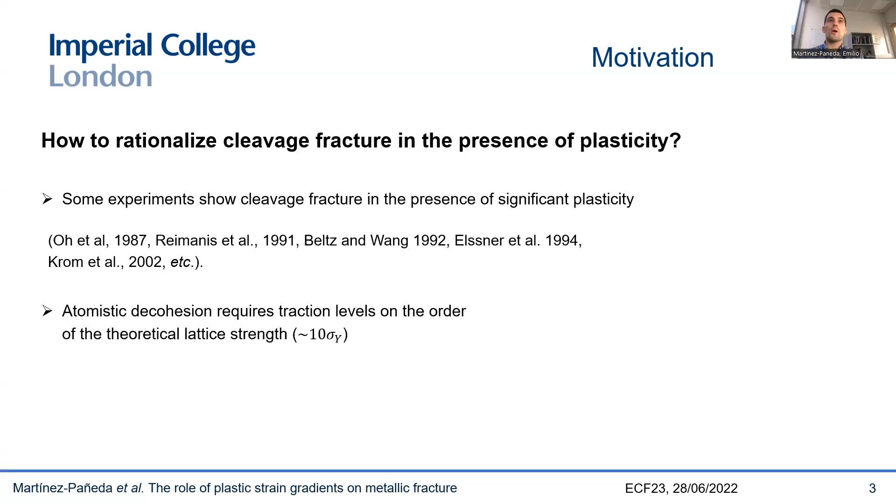This has always been quite puzzling for us, because we know that atomic decohesion requires attractive stresses on the order of the atomic or theoretical lattice strength, which is 10 times the yield stress. Even if we think of a grain boundary, we know that we need stress on the order of 9 times the yield stress to effectively decohere it. So this is puzzling because in the context of conventional continuum theories, there's no way that we can achieve those high levels of stress needed to reach the cleavage fractures we see in those experiments.

And we know this going back almost 40 years now, thinking of the work of Bob McMeeking. During his PhD thesis, he was the first to simulate using finite element analysis what the stress fields would be predicted ahead of a crack, taking into account large strains. As you can see, this is taken from one of his earlier papers. The maximum stress level that you get ahead of your crack is 3 times the yield stress. So we're very far away from those 10 times yield stress requirements needed to achieve the cleavage strength.

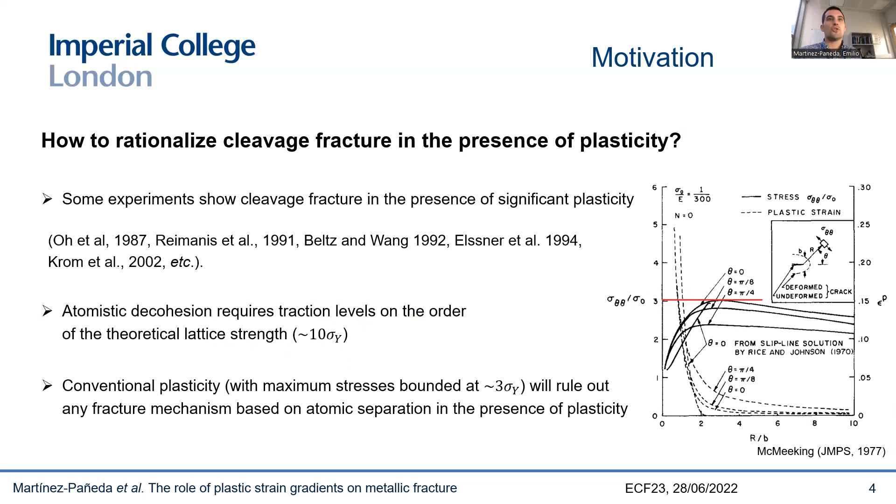This, of course, can change a little bit depending on whether you have a bit of hardening in your material. It may be that your maximum stress is 4 times the yield stress, but still you're very far away. So this is basically our conundrum: experiments are telling us that we are hitting this brittle fracture threshold, but conventional continuum theories, when we do finite element analysis of stresses ahead of a crack, tell us that we're still very far away, with stresses only on the order of 4 times the yield stress. So what is happening here? What are we missing? How can we jump from here to here, basically?

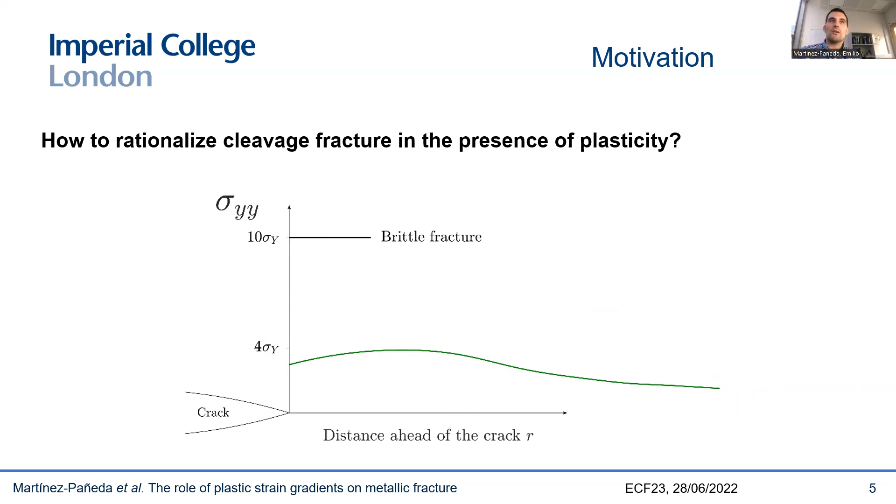Our main hypothesis is that what we're missing in this picture is the role of plastic strain gradients and geometrically necessary dislocations. The main motivation here comes from experiments, and there's a very wide range of experiments, particularly at the micro scale, that show geometrically necessary dislocations or plastic strain gradients can increase the flow strength in metals. I'm going to illustrate this concept with a set of experiments by Fleck and co-workers on thin copper wires, because they're really clean and beautiful, in my opinion. They tested very thin copper wires of different diameters under both uniaxial tension and also in torsion.

As you can see in uniaxial tension, those strain curves that they obtained were roughly insensitive to the diameter of the wire. More or less all the curves fall on top of each other independently of the diameter of the wire.

However, in torsion, when we go to these normalized stress strain curves, you can see there is a very significant size effect, with thinner wires being much stronger than thicker wires. The flow stress for thinner wires could be 3-4 times the one of thicker wires.

This is quite remarkable because these are, again, normalized curves, equivalent stress strain curves. So there's quite a significant size effect that you cannot capture with conventional theory. The critical observation is that whenever you have homogeneous strain distribution, like in uniaxial tension, so no gradients of plastic strain, then there's no stress elevation. However, whenever you introduce gradients of plastic strain, geometrically necessary dislocations, then you get a very significant stress elevation associated with these plastic strain gradients.

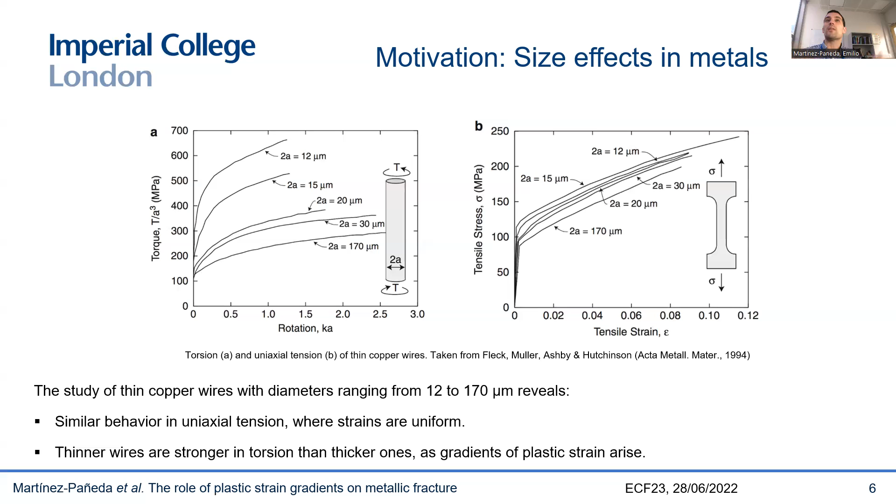The key point is that you build these strain gradient plasticity theories by typically defining your flow stress as a function of not only the plastic strains, but also the plastic strain gradients, or defining the plastic work, again, not only as a function of the plastic strains, but also of the plastic strain gradients.

The moment you bring a gradient of deformation into the picture, then you need a length scale due to dimensional consistency. This length scale is a material parameter that somehow characterizes the ability of a material to harden in the presence of these geometrically necessary dislocations, of these plastic strain gradients.

Because as you can see in the experiments, what these GNDs are doing is basically acting as obstacles to the movement of statistically stored dislocations, and therefore elevating the stresses.

The good news is that using these gradient plasticity theories and fitting this length scale, which you can think of as something like the strain hardening exponent, a material parameter that characterizes the hardening abilities of our material, when you fit that length scale that typically gives you a value between 1 and 10 microns, you see that you're able to get a very good agreement with experiments.

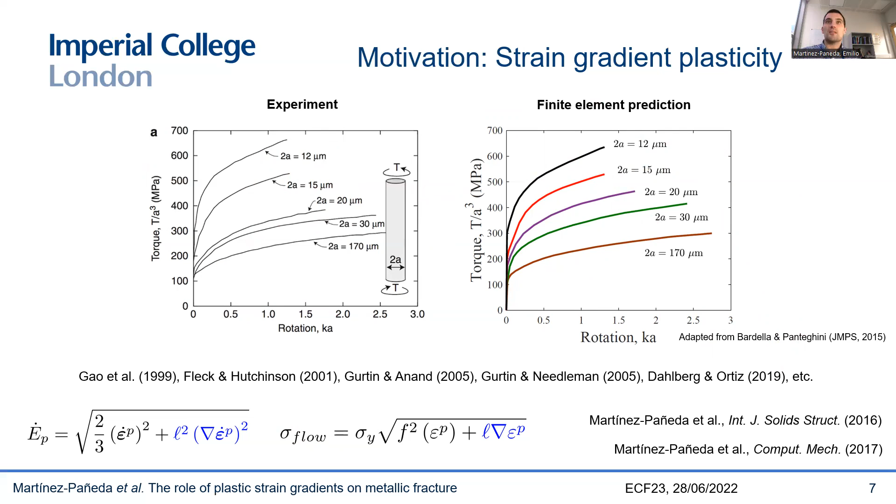These are finite element predictions of those experiments on thin copper wires, from Lorenzo Bardella and Andrea Panteghini, and you can see that they get a very good agreement. So we are able to use these strain gradient plasticity models to predict the role of GNDs and plastic strain gradients. This is what we want to do in fracture.

I should emphasize one thing here. When I'm talking about fracture and gradient effects and size effects, I'm not anymore talking about small samples, small, very thin wires. I'm talking about large samples which have a small plastic zone adjacent to the crack tip.

This is similar to what you see in indentation. You have an indenter, you may be indenting a very large sample, but you get size effects associated to the fact that you have a small plastic zone near your indenter tip. So the size effects are related to the size of the plastic zone, not necessarily the size of the sample.

The implication that results from this is that no matter the size of your sample, whenever you have a crack, you're typically going to have a plastic zone that is physically small, and that therefore will contain strong spatial gradients of deformation and a very significant GND dislocation density.

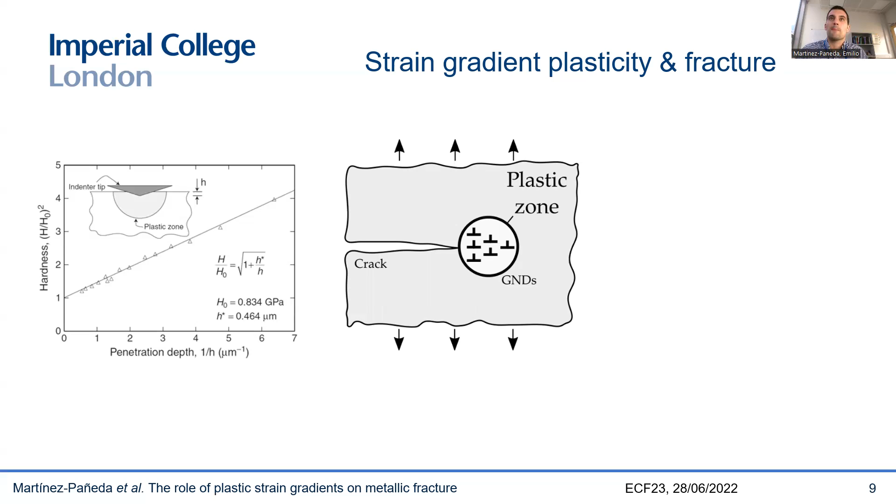Those GNDs act as obstacles to the movement of the statistically stored dislocations and elevate the stresses near a crack, in the region where plastic strain gradients are significant. Nowadays we can measure GND densities ahead of crack tips and inclusions, and experiments show that GND densities are very large and dominate material behavior near inclusions and cracks.

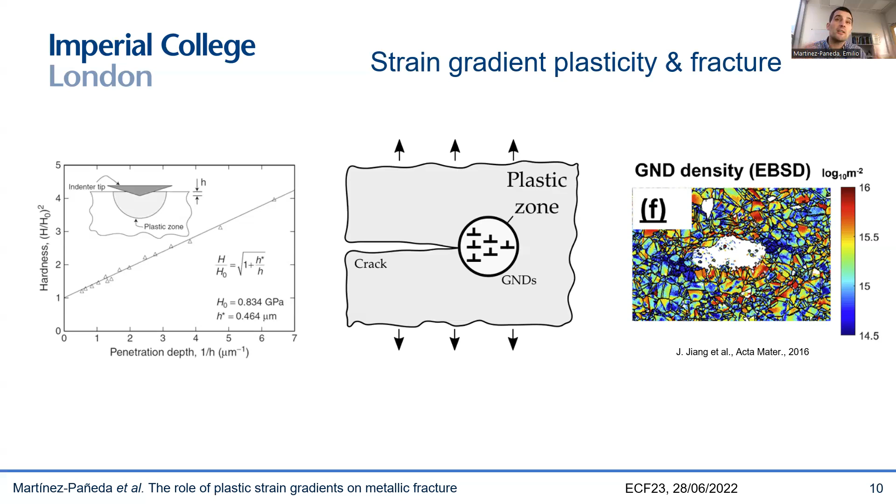Far away from the crack tip, both conventional plasticity and strain gradient plasticity agree. However, as you approach the crack tip, GNDs start to dominate over statistically stored dislocations. You have a strong influence of this plastic strain gradient, and dislocation hardening mechanisms kick in. As a result, you get a very significant stress elevation.

The implications from a fracture mechanics point of view are that if you're dealing with a fracture phenomenon where the critical distance for fracture, the fracture process zone, is very large, like ductile fracture, you don't really care that much about these GND effects, these plastic strain gradients, because essentially you are hundreds of microns away from your crack tip.

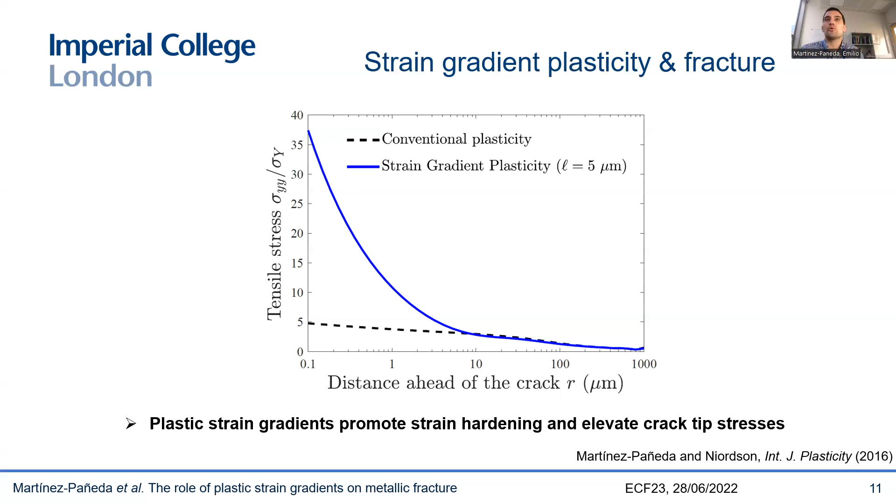So we tried to use this hypothesis. We said, okay, maybe this elevation in stress that results from GNDs, from plastic strain gradients, is what is driving those brittle fracture processes. And we looked into this by doing a cohesive zone analysis.

We tried to simulate crack propagation. This is inspired by a classic paper by Tvergaard and Hutchinson in JMPS 1992, where they use cohesive zone elements and conventional von Mises plasticity to predict crack growth resistance curves, R curves, associated with plasticity. The idea is quite simple.

You basically place these cohesive elements along the crack propagation region, and these elements glue the two crack surfaces together. The behavior of this glue, these cohesive elements, is governed by a traction separation law, like you see here, where the critical parameters are basically the area under the traction separation law, the fracture energy, and the critical cohesive strength, this sigma hat here.

Then the shape of the traction separation law will give you this critical separation. Here we choose to follow Tvergaard and Hutchinson and use a trapezoidal traction separation law, which gives us this expression for the fracture energy as a function of the critical separation. Then, as in their paper, we can define a critical or reference stress intensity factor at which cracking will initiate, corresponding to this fracture energy.

You can also define a characteristic length of the fracture region, this R0 characteristic length of the fracture process zone, depending on the fracture energy, the yield stress, Young's modulus, and so on. If you do a dimensional analysis, you see that the R curves, the crack growth resistance curves you predict, are essentially a function of these non-dimensional sets.

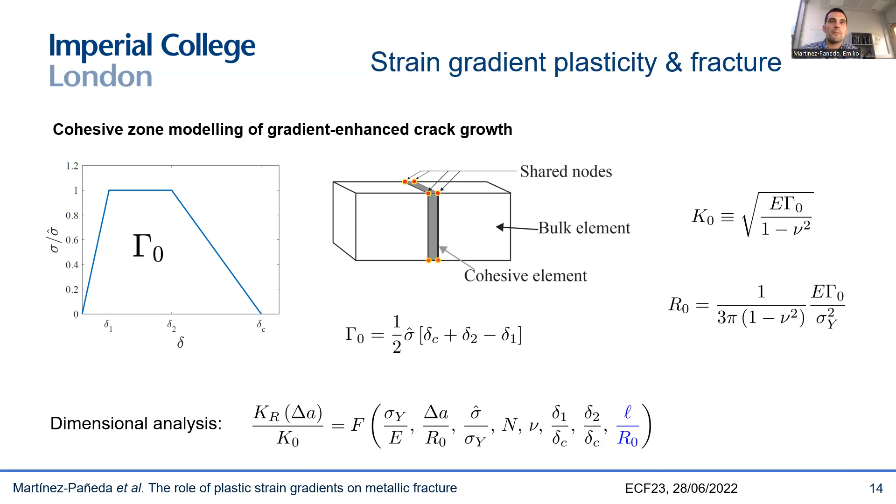So before we look into crack propagation, we again look at the stationary crack tip fields, and you can see that this ratio between the length scale and, in this case, the plastic zone, is what governs the material behavior.

And as you would expect, the higher this value, the higher the value of this ratio, the more easy it is for a given load for the material to harden, to exhibit an elevation in stresses associated with these GNDs. So this is all in agreement with expectations.

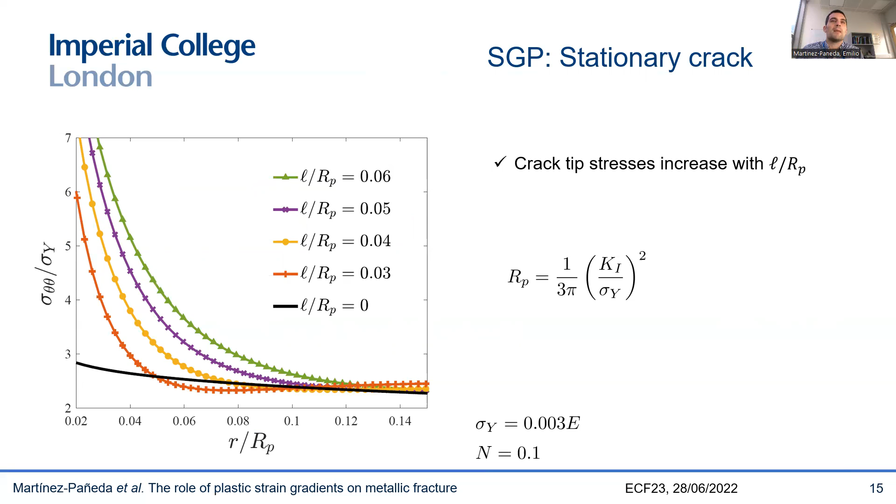And then we model this crack propagation curve, so this R curve. This is the stress intensity factor, a measure of the crack tip stresses of the applied load, versus the crack extension, normalized by this R0. You can see that depending on the value of the length scale, you go from this very significant plastic dissipation that you get in the case of conventional plasticity, and this agrees with those results by Tvergaard and Hutchinson. But then as we increase this ratio of L divided by R0, we see that we're having a very significant degradation of the stresses, of the fracture resistance, basically.

You have much higher stresses, and therefore you lower your fracture resistance. And it's a key point to emphasize that what matters is the ratio between the two, because the length scale is a fixed parameter, it's a material property. We measure that doing indentation, microbending, microtorsion, like I showed you before.

But that is a fixed material parameter. But this R0 depends on the applied load and on the fracture energy. So whenever you have maybe a ductile fracture process, then R0 is going to be quite large because the fracture energy will be on the order of thousands of kilojoules per square meter, and therefore this value is going to be small, and you're probably in a region where it doesn't matter. But whenever you have a brittle fracture process, this fracture energy is going to be small, maybe on the order of a few joules per square meter, and therefore this value is going to be small and this value is going to be large.

So this is suggesting that we're going in the right direction. It seems that our results should not be independent of this ratio. We know that depending on the fracture process, you can have a plastic zone that is larger or smaller, and that's going to make a difference on your gradient effects.

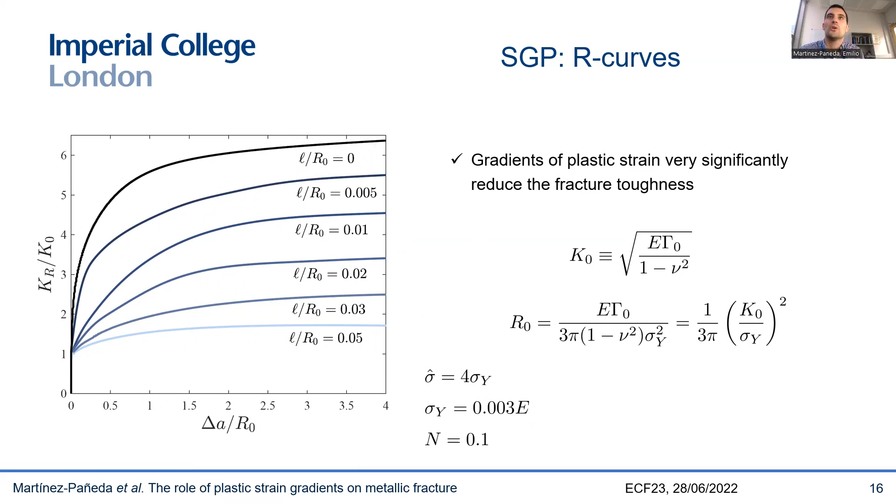And this is what you see here. First, I'm plotting the result for conventional plasticity. This agrees with this result by Tvergaard and Hutchinson. You can see that our steady state fracture toughness is very far away, basically asymptotically increases as you approach 4 times the yield stress, because these are the maximum stresses that you get with conventional plasticity. So there's no chance that you will be able to predict fracture using conventional plasticity models if you have a cleavage strength, if you have a grain boundary strength that is 10 times the yield stress.

However, as we introduce gradient effects into our model, you can see that eventually, depending on the magnitude, on the value of this ratio, the length scale divided by R0, we're able to predict fracture even for values of our interface strength that are on the order of 10 times the yield stress, or even for the theoretical lattice strength. So that's quite interesting because, as I said before, this provides a mechanistic rationale to understand why we're seeing cleavage fracture in the presence of plasticity.

And this is what is happening essentially. So you can have a lot of plastic work coming out from those dislocation densities, from the evolution of those dislocations, but you can still get very high stresses if your fracture region is small compared to the ability of the material to harden due to the presence of GNDs. And again, I emphasize that the length scale is a material parameter, but R0 is dependent on the fracture energy. So again, it's dependent on the fracture micromechanisms that are taking place.

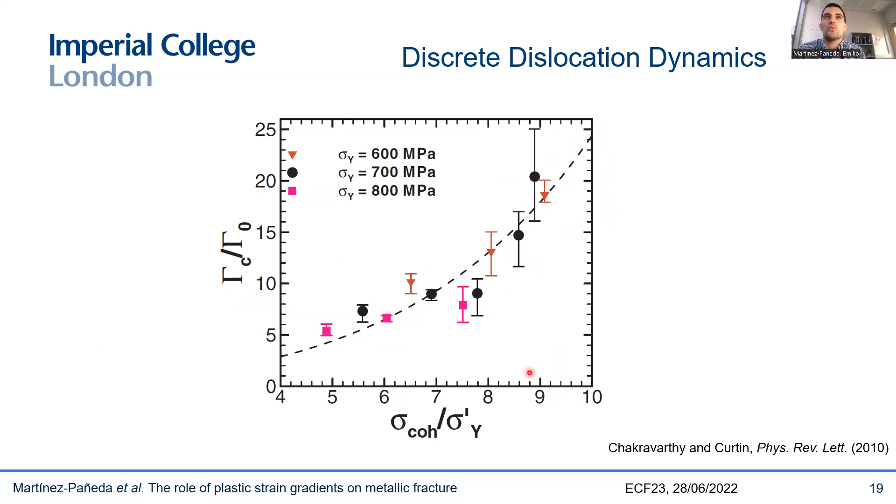So these are discrete dislocation dynamic simulations, and you can see that somehow they will also be able to capture eventually fracture near this region of 9-10 times the yield stress. It seems to agree pretty well with some of the predictions of strain gradient plasticity. And this framework allows us to rationalize many of the experiments that I showed you before.

Let me discuss some of them. One of them is cleavage fracture in bimaterials, with the experiments by Korn et al. These are some classic seminal experiments where they had a crack between sapphire and niobium, and they measured very significant plastic work in niobium, but at the same time, when they looked at the fracture surface, they saw a very clean fracture surface with a crack propagating in a brittle fashion between the sapphire and the niobium.

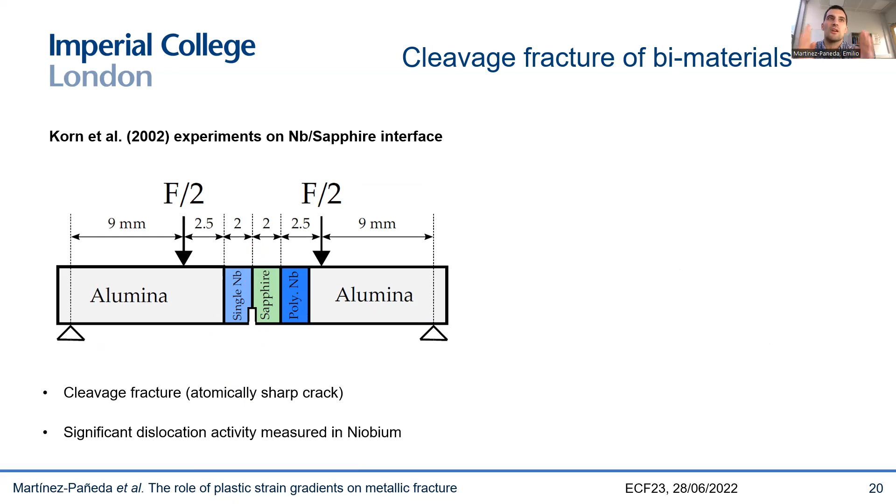So within the bimaterial, what we see when we use one of these strain gradient plasticity models, in this case Gurtin's distortion gradient plasticity model, is that when you account for the role of GNDs and plastic strain gradients, your stresses are high enough so that you can predict this, you can attain this cleavage fracture strength that we discussed before.

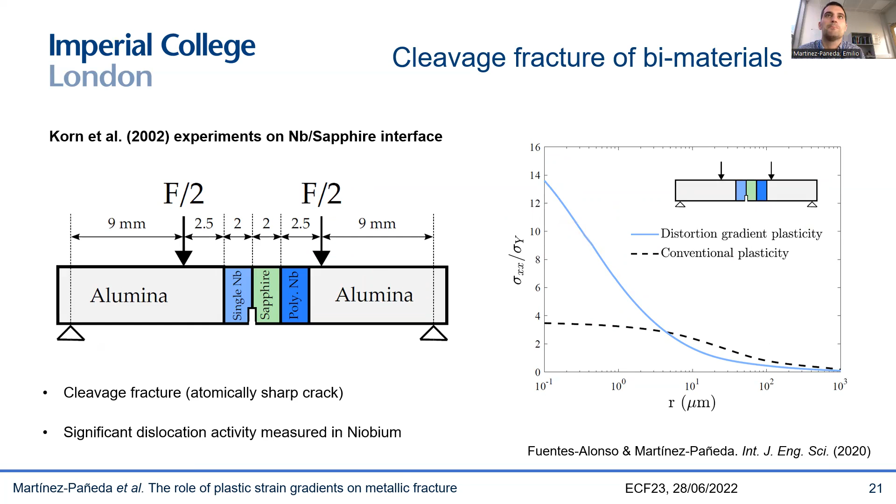So in this set of experiments, for the loading conditions that they consider, we're able to get at the critical stresses that are high enough over a sufficiently long distance such that a crack can grow. Another interesting case is low temperature cleavage.

And what we did here is to use a Weibull model, a 3-parameter Weibull model, and calibrate those materials with a classic European steel project, where they had measures of probability of failure, so you can calibrate the probability of failure for different temperatures. Essentially, at the end of the day, a Weibull model is a fitting exercise.

So we basically were able to see that we get very different values of M and the threshold and all the parameters involved in the Weibull model. But this doesn't really tell us much, right? Because in a way, we are calibrating the data. It just tells us that there's a big difference with conventional plasticity.

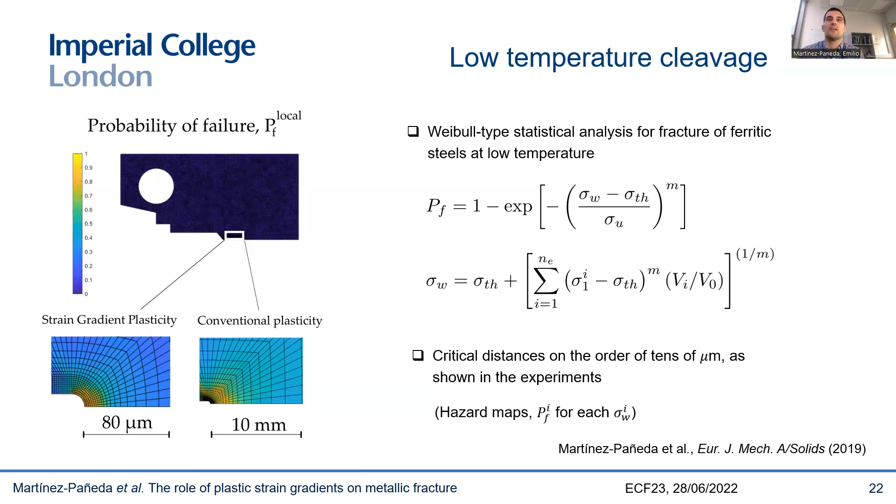However, what made a difference was the fact that we calculated these probability of failure maps, and we saw that if you had conventional plasticity, then your hazard maps were distributed over tens of millimeters, while if you have gradient plasticity, then your probability of failures were restricted to tens of microns. And we know from the experiments that the critical distance in these materials is typically tens of microns. So it seems that we're going in the right direction.

Another area where this is very important is hydrogen embrittlement. We know that the presence of hydrogen, or when we expose metals to hydrogen-containing environments, we have an uptake of hydrogen, and this reduces by orders of magnitude the fracture resistance, the ductility, and the fatigue crack growth resistance of metals. So it's very important here, and it's important for a number of reasons.

The first one is that the amount of hydrogen that you have in your material depends on your hydrostatic stress. Hydrogen accumulates in areas of high hydrostatic stress. This is the simplest equation one can use to simulate hydrogen transport within a metal, and this is the steady state equation, which shows that there's a very significant dependence on the hydrostatic stress, an exponential term.

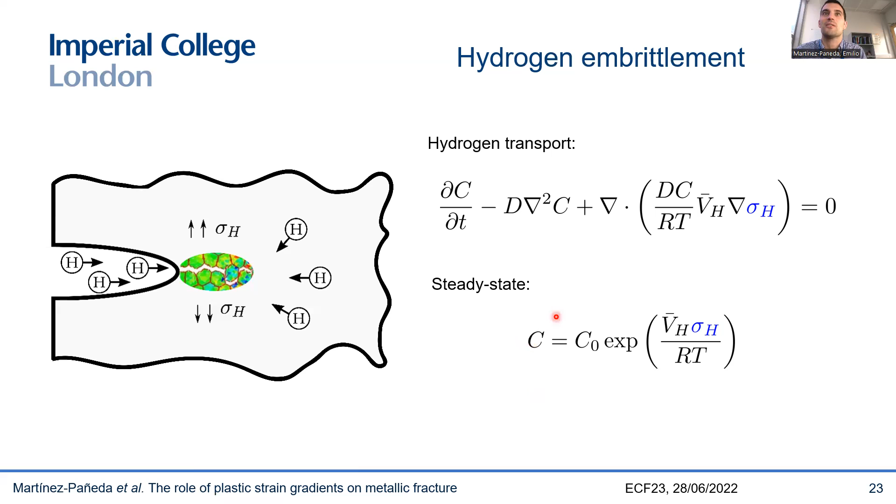So if you really want to know what your concentration of hydrogen is, and you want to know that precisely to be able to predict these hydrogen-assisted failures, you need to know what your hydrostatic stress is. So as you can imagine, GNDs are going to play a big role there.

And there's another reason for this: the critical distance for hydrogen embrittlement is 1 micron ahead of the crack tip or less, around that number. You can get that from experiments, because in hydrogen embrittlement, you basically see this 3-stage regime.

Whenever you're plotting crack velocity versus stress intensity factor, you have a cracking threshold, you have a stage 1 where the crack speed grows significantly with the loading rate, but then you have this stage 2 where no matter how much you increase your stress intensity factor, your crack speed remains the same. And the reason this happens is because you have a diffusion-dominated regime, basically.

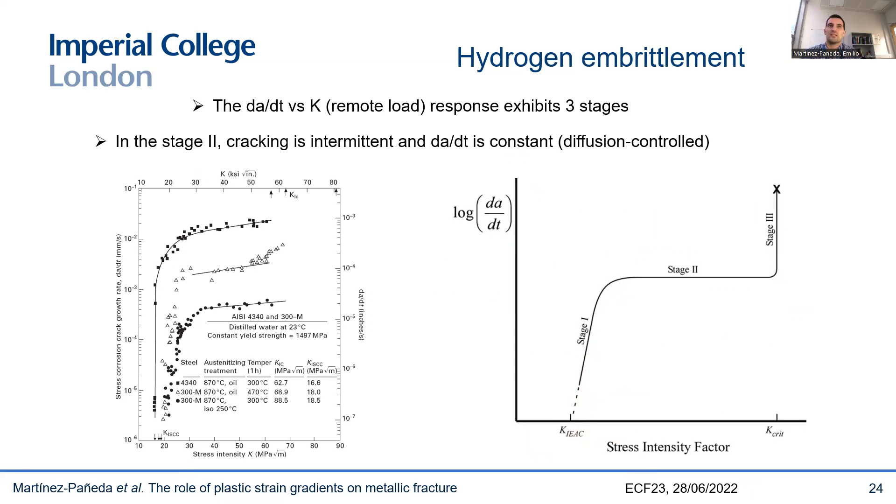Your crack can only grow whenever the hydrogen has had enough time to reach the critical distance ahead of your crack. So the crack is effectively jumping whenever the hydrogen has reached the critical distance. Since we know from experiments what the crack speed is, for example for this nickel superalloy, we know it's probably 0.04 microns per second.

We also know the analytical solution for the diffusion of hydrogen atoms, which depends on the diffusion coefficient and time. We effectively have two equations that we can solve easily, giving us the critical distance, the jump of the crack, and how long we need to wait for the hydrogen to reach that critical distance. For this specific case, knowing the diffusion coefficient of the material and the crack speed, we can solve the system and get a critical distance of 1 micron.

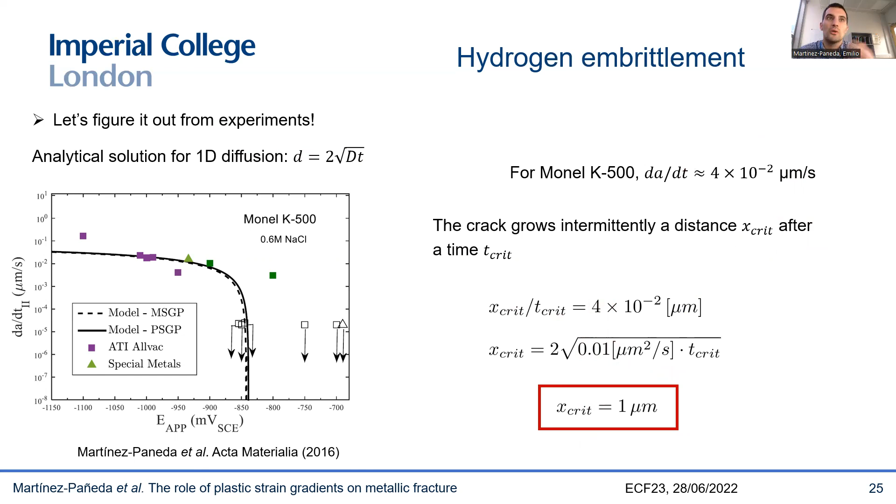At 1 micron, as we saw before, gradients play a big role, and we therefore need to account for GNDs if we want to tackle this hydrogen embrittlement problem.

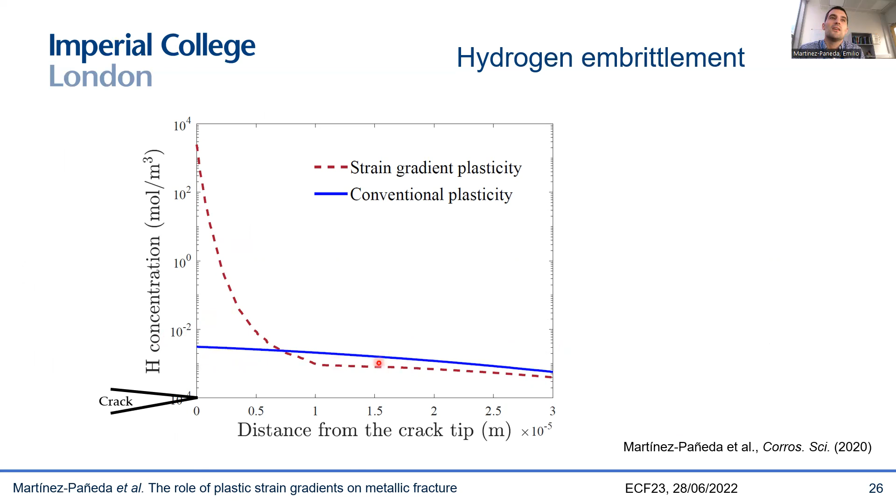If you plot the hydrogen concentration ahead of a crack, as you'd expect from the previous results, conventional plasticity under-predicts very significantly the hydrogen concentration ahead of the crack tip compared to gradient plasticity. It's very difficult to measure hydrogen content so close to the crack tip, but there is some experimental data out there, and it seems to match what we predict with gradient plasticity. The hydrogen concentration increases rather significantly as you approach the crack tip, whereas conventional plasticity predictions lie far below.

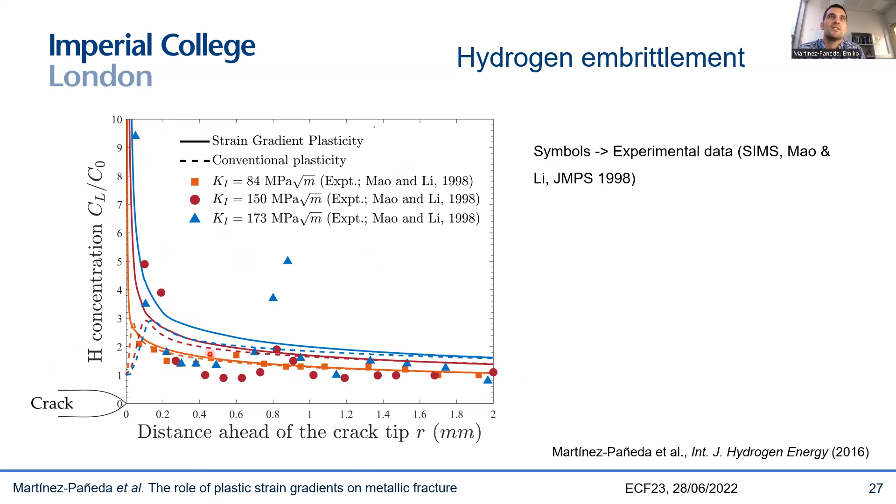We use this rationale to try to understand the embrittlement process, because in embrittlement you basically have metals that fail in a ductile manner but suddenly fail in a brittle fashion due to exposure to hydrogen.

However, the moment we bring hydrogen into the picture, what we know from atomistic calculations and experiments is that hydrogen reduces this fracture energy. The surface energy, the fracture energy, can be reduced by up to 40-50%, depending on the material, due to the presence of hydrogen atoms. When we take that into account, it changes R naught, and therefore this ratio.

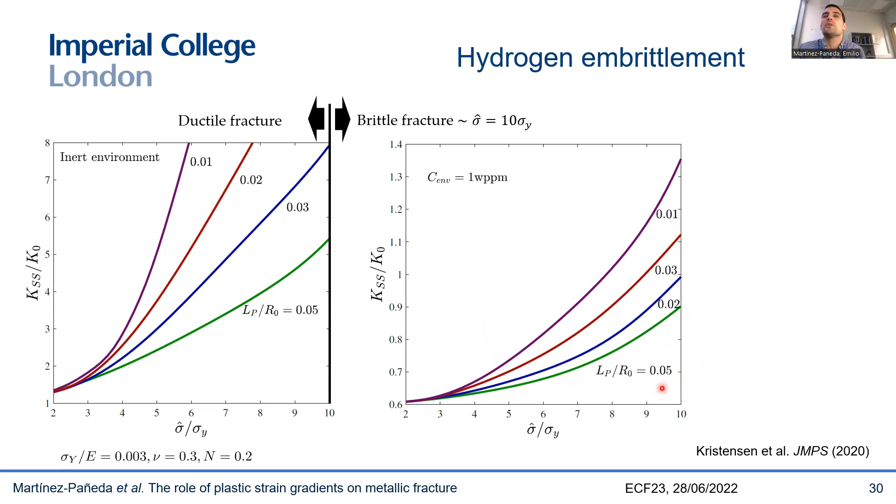So for a given strain gradient plasticity length scale, we see that suddenly all these curves shift. Now, due to the presence of hydrogen, we're able to predict brittle failure even if we consider cohesive strengths on the order of the theoretical lattice strength or the grain boundary strength.

That takes me to the concluding remarks, hopefully leaving a bit of time for questions. I just want to emphasize three takeaway points.

The first is that we believe we have a hypothesis to understand why brittle fracture is often observed in the presence of significant plastic flow: we have very high crack tip stresses that result from the strain gradient hardening arising due to the presence of GNDs and plastic strain gradients. This is something we can capture using strain gradient plasticity models, a class of constitutive models that capture the role of GNDs and plastic strain gradients.

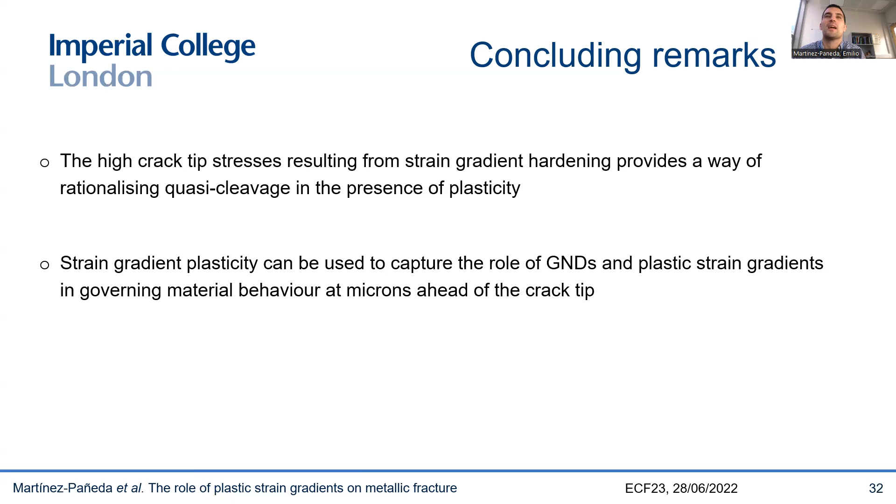We calibrate them with experiments, and then use them to predict what's going to happen ahead of a crack. We have shown that by taking this into consideration, we can explain experiments showing the brittle failure of hydrogen-embrittled materials. We can also explain low temperature cleavage and the fracture of bi-material interfaces, among other phenomena.